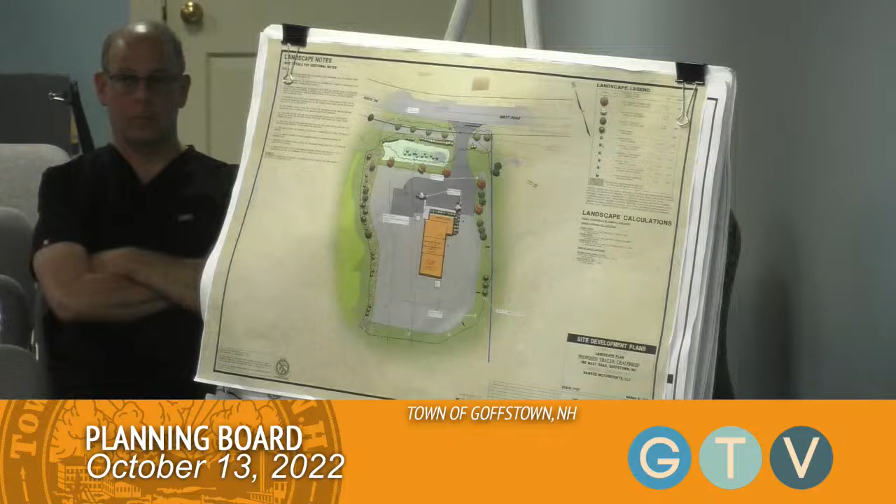There are 2 phases. The first phase is just going to be to create a small clearing with gravel and pave the driveway entry sequence, and construct the drainage pond, which will include only overflow storage for his existing business. There will be no showing of inventory to customers or sale of equipment on this site under the initial phase.

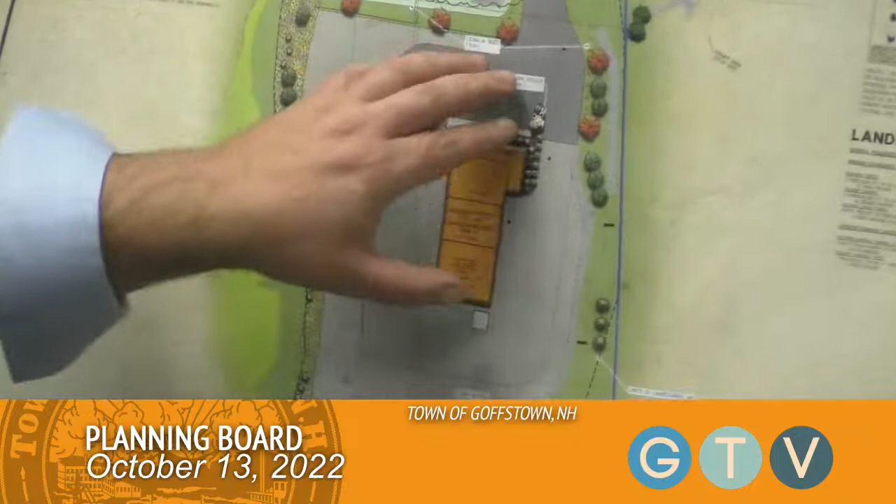The second phase, or full build, consists of a 4,800-foot building with some garage bays, the creation of the parking field, and the creation of the storage area in gravel on the remaining portion, as well as the landscaping.

The waivers are, and they've been submitted in your package: one for wetlands and topographic survey over the parcel, which is roughly 27 acres. We've surveyed the wetlands and topo within the development area, such that we know we're not within any jurisdictional setbacks. We've identified all the jurisdictional and topographic resources required for construction, but we're seeking just relief from the overall undeveloped back parcel for topographic and wetland survey.

And then finally, for the parking area, which I actually submitted a waiver for—let me see here, just so I clarify things properly for the record—this landscaping waiver is for section F, Appendix 2.3.

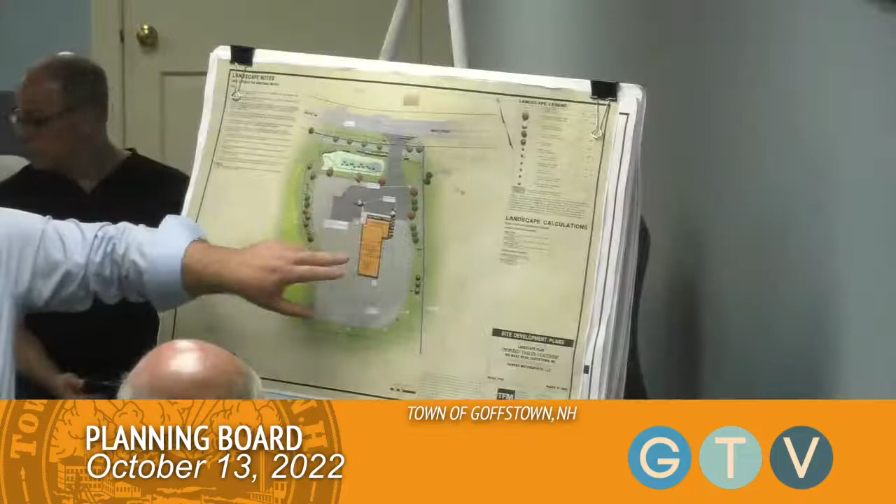Interior landscaping requirements, phase 1 only. It's really a question of whether or not that applies to the project. It's a requirement for trees and shrubs to be put in relative to the parking area, or in this case, I guess you'd have a display area. But for phase 1, it's a small footprint, so the tree and shrub plantings required for this project are outside of that footprint area. To plant them in the first phase, obviously, it would be in the grass, and they'd be worked around for phase 2.

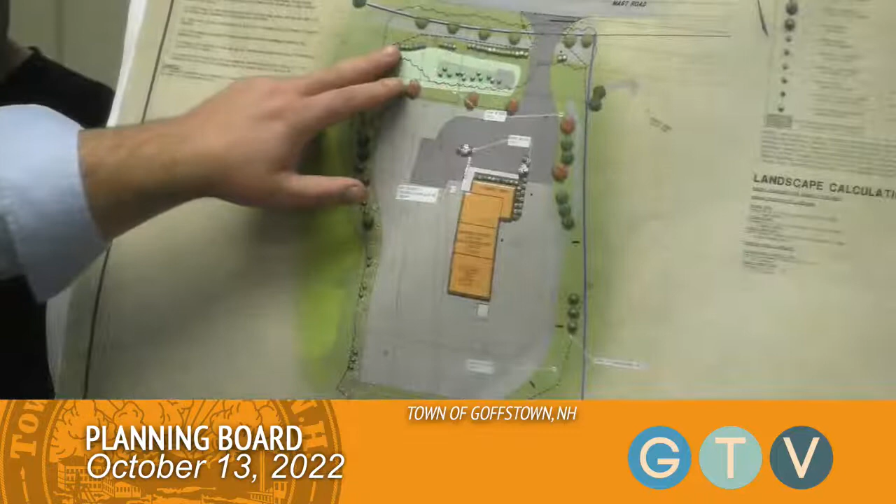For phase 1 of the project, we are proposing a lot of plantings, as you'll see in the right-of-way along the rail trail area. Those are shown on the site plans for phase 1 that show all of these proposed street tree plantings. The shrubbery along the rail trail will all be done and completed in phase 1.

So that comes to the issue of the rail trail and the proposed improvements, which we've worked on for a long time and met with the rail trail group in the spring to outline what we were looking to do. It was identified that accommodations could be made by our development to utilize that area.

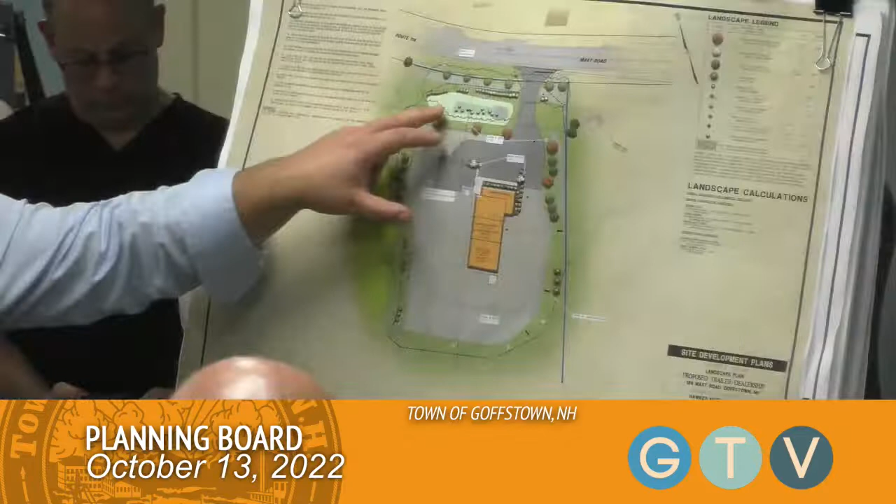There were some specific site constraints that will enable us to benefit from the better soil conditions. As you go to the south, you have ledge outcroppings, such that to build this program, the use of this sandy area adjacent to the road and the rail trail minimizes our footprint for digging and excavating. It's also not identified by the rail trail group as an area of their potential use.

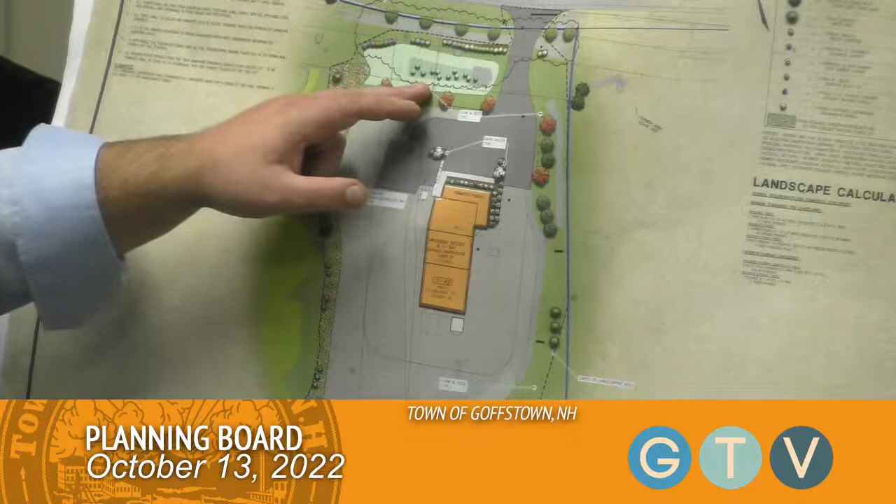This general drainage design for the project will intercept a lot of the runoff coming off the hillside and detain and infiltrate that water into this new BMP, which will improve the drainage conditions in this vicinity going forward, where there's currently puddling and undefined drainage patterns in that right of way.

We're also going to be planting enhanced shrubbery streetscapes, which will dress up and provide a positive visual component that will benefit the town. And Austin has agreed to provide some of the labor for the improvements to the rail trail, so that when this section is improved in the near future, we're providing that benefit to the town.

Most importantly, we've got the rail trail group and the select board, who have kind of green-lighted us today. We've gone forward over the several months, before I actually even came to the board, with no negative feedback. Then last month I saw in the staff report that there's some staff against it, which is unfortunate. I would have approached this differently if I'd had earlier feedback — I know that's not necessarily required of the town — but if they'd had those feelings initially, we may have taken a different approach.

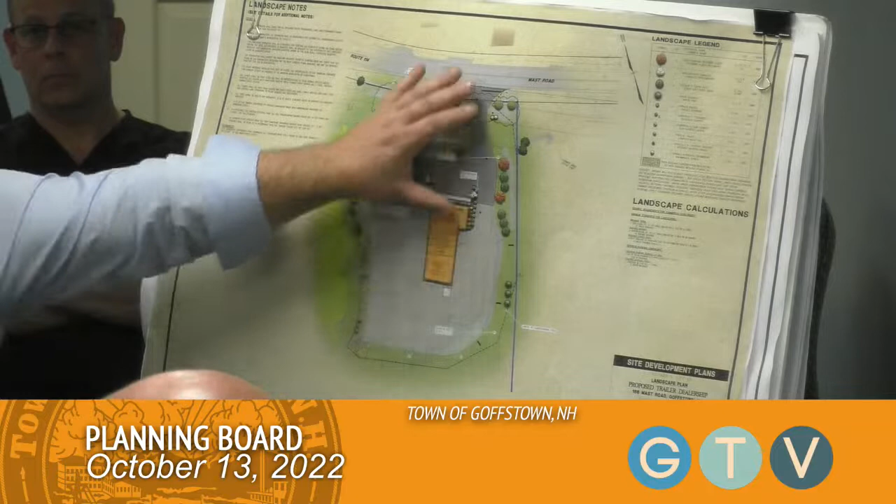Getting back to the basis — the soils as you go south on this property change. The general soil structural qualities and the soil complex change. We have good sands down near the rail trail, but as you head south, you develop shallow restrictive layers, ledge conditions, and a high water table. These features are unique to this property and potentially other properties in this general vicinity.

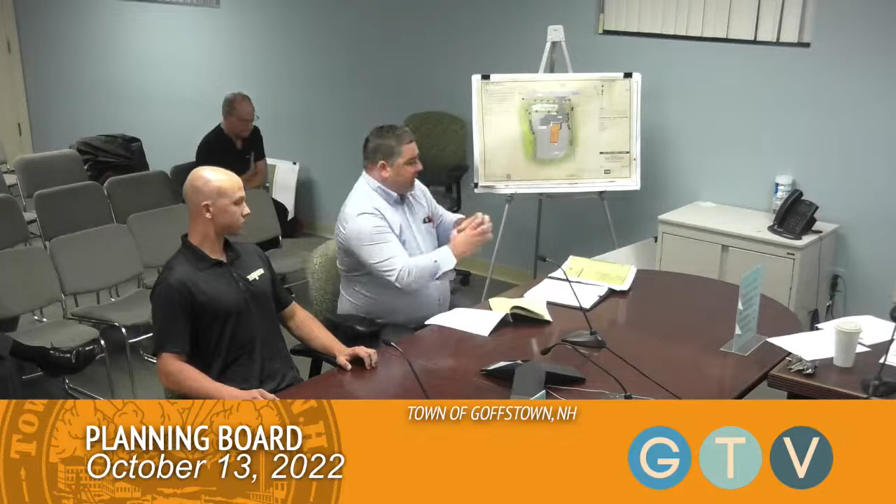That allows us, if we were to utilize this space within a portion of the existing rail trail, to keep our overall site work and excavation minimized, where we're not working in the ledge conditions and disturbing more of the natural woodlands to the south. That's a unique aspect of this property, which is different from other properties, I believe.

Finally, we're basically looking to secure a permanent drainage easement to construct this — essentially an infiltration pond — in a portion of the rail trail right-of-way. It would be maintained by the applicant or his heirs and assigns going forward. I think it will benefit both the public, or the town, in terms of the drainage improvements, as well as Austin, by allowing him to minimize his site costs.

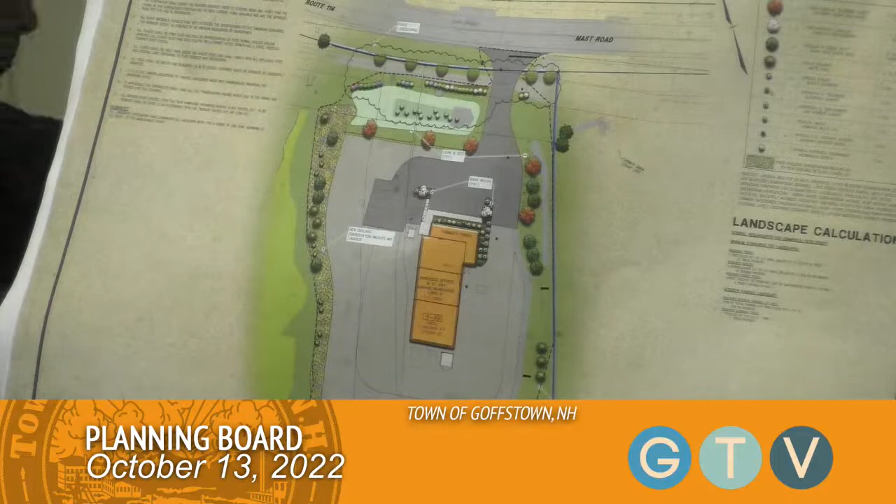Like I said, the terrain starts to slope as you go back into the hillside. So the further the site gets pushed back from the road—and it's already very far from the road because you have a 60-foot right-of-way minimum from the rail trail, plus the road right-of-way is pretty wide—so we're already back further than we'd like to be for the display of this equipment, but more importantly for site balancing purposes, this is a plane of earth that has to slope generally flat within the development footprint. So as you go south, it creates more of a cut situation, generating unnecessary cut excavation and cost that would be absorbed by the client.

So I think that's a hardship to him that would be imposed. Anyway, that's the main thing I'd like to resolve and have some feedback and discussion on, because it would obviously involve significant redesign if we were not able to make a deal with the town for this easement.

And then some of Scott's comments in his letter, which I did not address, are directly related to the detention pond condition. So I did not invest any effort going forward on that. I am meeting with Scott next week to look at some general drainage at the intersection of the proposed driveway, and how we can clean that up and potentially make improvements to the new intersection.

I'd also like to say that this driveway location, although not approved by the DOT, is recognized as the most appropriate and feasible location for the new access point, due to the fact that it has the best sight lines along this section of road. Therefore, that is a fixed location as part of the DOT process for this project.

I understand that a letter has been submitted, which I haven't seen, but we were aware of an abutter claiming to have potential rights of access to the parcel, and something has been submitted on that.

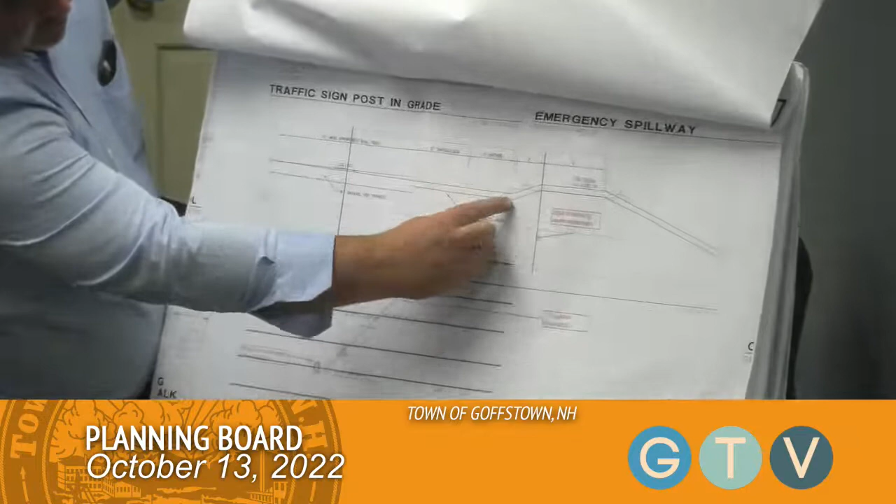This is a 10-scale blown up, so here's your rail trail, this 10-foot strip, the 3-foot shoulder, 3-foot grass beyond the shoulder, and that's where this berm starts—a 3-inch to 5-inch elevation rise, and then it goes down a few feet to the bottom. It's the same situation; having an embankment outside of the shoulder area does not impede the intended use of the 10-foot path.

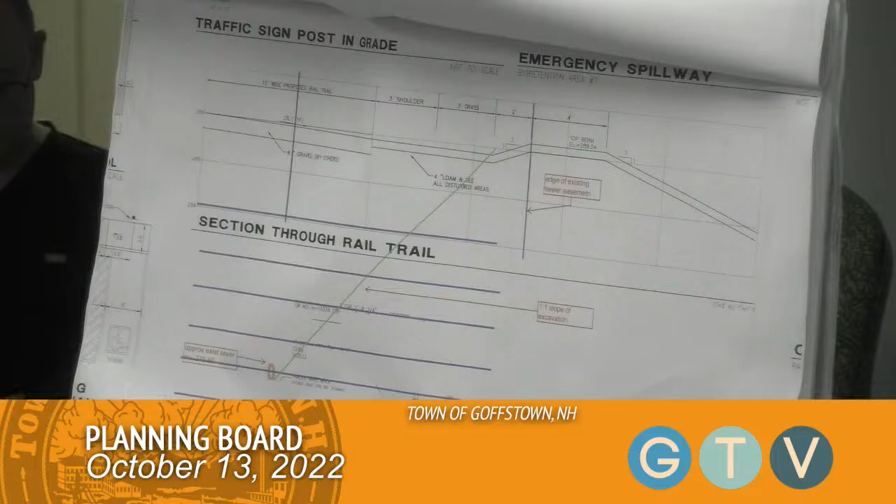That's why the Friends of the Rail Trail, as an advisor to the Park Department on the trail's construction, were not concerned about the earthwork for the detention pond. It doesn't impede the passage of the path. So the detention pond in its current design doesn't have the 1-foot freeboard. The town engineer has other concerns about why that detention basin is there.

On your other comment, which I know you haven't seen—in anticipation of this, I plotted the existing sewer trunk line here, centered on the road's cutback. That's a 1 to 1 cut slope. If you were to open cut it, it shows that the cut can be made without even impacting the berm itself, the start of the berm.

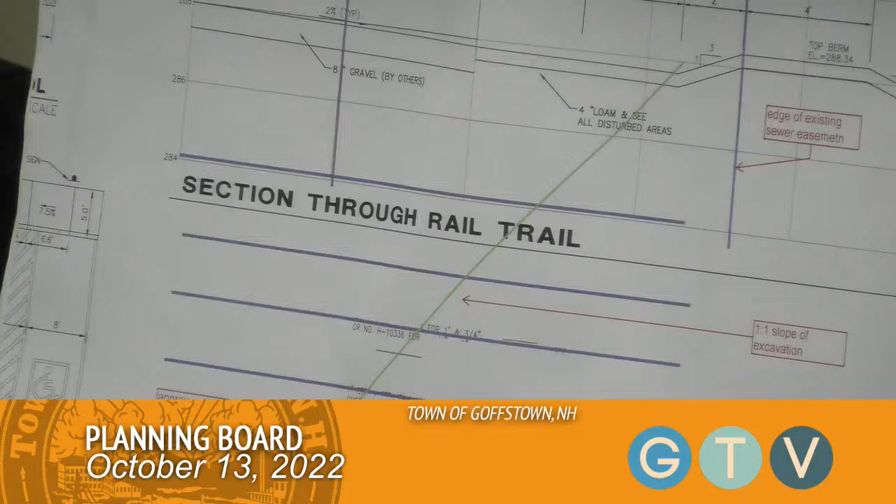So in terms of your concern with construction, because of the width of the easement—a pretty wide easement, 25 feet, is the width of the sewer easement, centered on the pipe—that would be an open cut condition showing that it would not interfere with the operation of that pond. Just so you know, you haven't seen that.

Have you discussed any of this with the sewer commission? We met with the sewer commission and presented the same plan we're talking about today. They had no concerns, other than they wanted us to try to tie into an existing stub.

Who said you have no concern? The sewer commission, when I met with you. We talked about your stub, we didn't talk about a detention pond. Correct, yeah. Well, let's just determine the conversation here—you said the sewer commission didn't have any concerns when I met with you about the stub.

With the development, that's fine, and you can continue with the proposed line, flow, and capacity at the plant. Yes. We did not review this cross-section, and we didn't get into any detail relative to the pond condition or the easement. At that point we hadn't—that was actually in the spring. Yep, I remember. We hadn't gotten this far with everything, so you're correct. Thank you—we're happy to go back to the sewer commission if you'd like.

So my question for you is, I have two questions. Why did you not do testing along the sideline of this property adjacent to the wetlands on the north side for your detention area? I understand soil conditions can change within the site, but did you do actual test pits to prove there's no sandy soil on the north side?

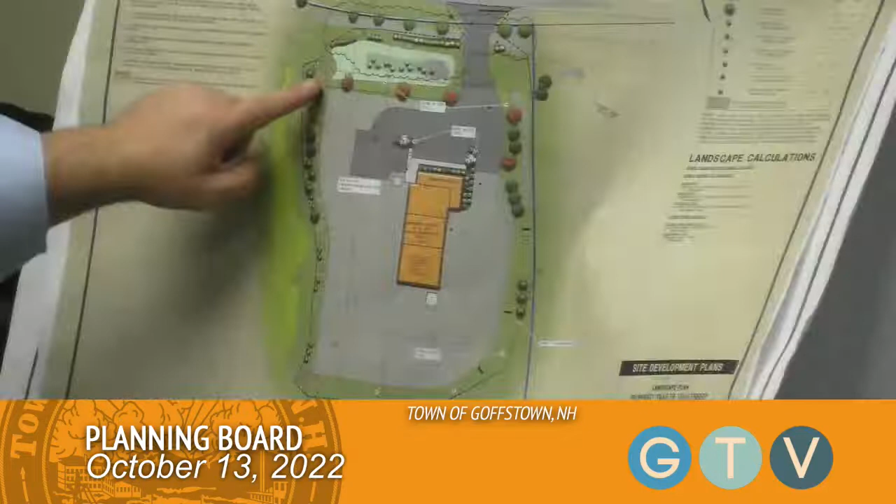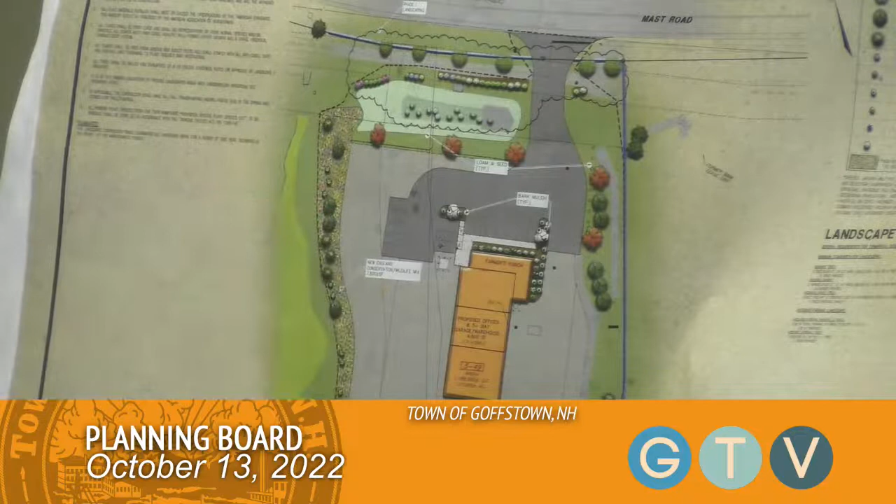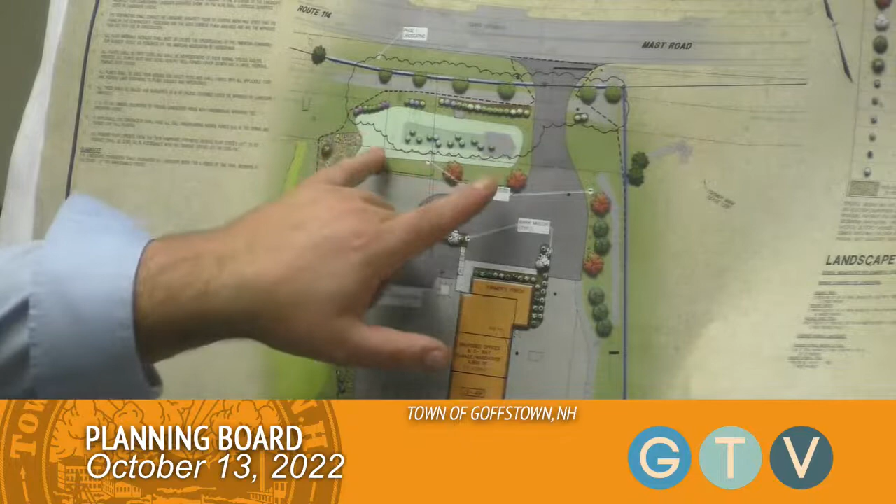And also, generally speaking, we did do test pits along the corridor and then back into the site. We found that the restrictive layer is higher in the ground as you go south, which is expected because you're getting into a hillside condition. So we have the cleanest sands right in this area here.

Any other members of the board? I have a question. What is the town's property interest? Is it a fee interest, is it an easement? What does the town hold? A lease, right? Well, it was a land lease. I think David could speak to this better than I could.

Or what's the current status of the town's dispute over that property interest? Land lease—I believe I've seen a report from a town attorney that the wording of the land lease, as it was interpreted prior to the Civil War, in fact meant a perpetual ownership. That's my understanding. The reason I ask is an easement can be for a limited purpose, but if you have essentially a fee interest, you have exclusive use and control. So if it's just an easement for a rail trail, you could in theory have another use on the property. But if the town's interest is greater than that, then it's as if it's going on town property. That is my understanding.

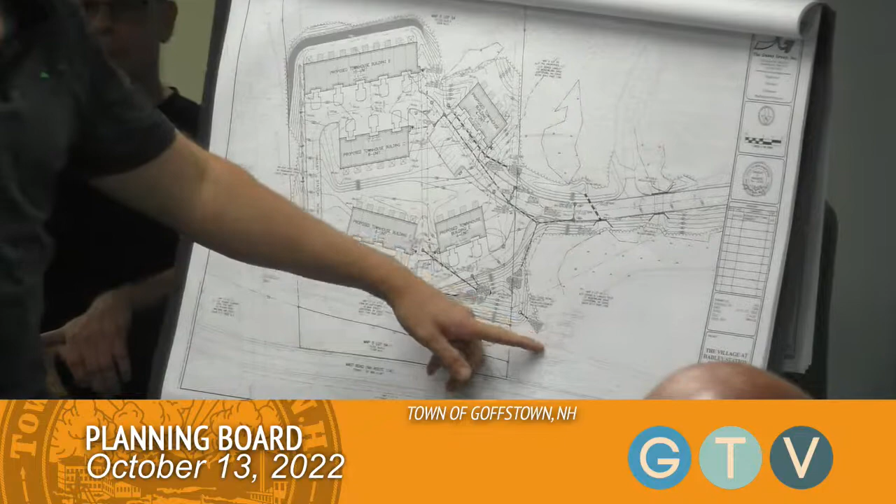So what happens is the drainage splits, and our modeling shows this, and a portion of the property comes to the edge of the rail trail and then drains, because the rail trail from an elevation standpoint is higher than anything else. So unless it was like a massive flood, it wouldn't go over the rail trail. It directs to each side. So you get a directed flow to this point here, and you get directed flow to this point.

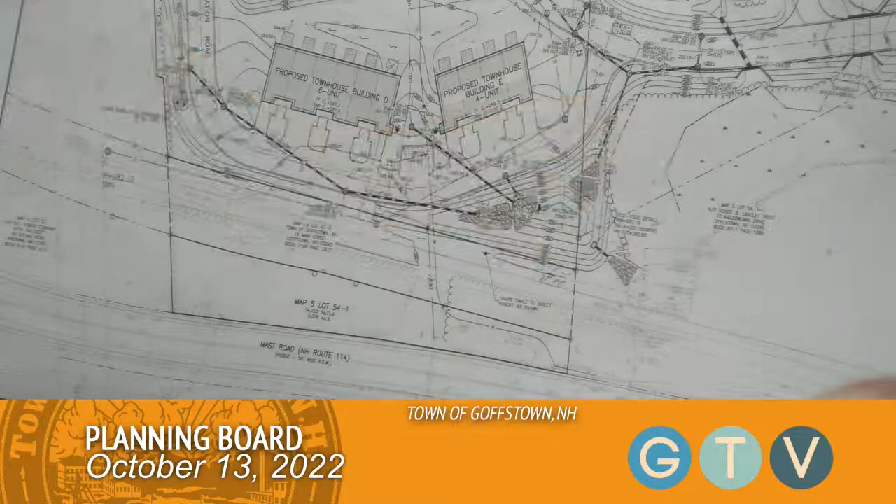Because we're altering all the land right adjacent to our property line as part of our pond construction, I wanted to make sure it was very much understood that from a drainage standpoint, and this is for the benefit of the rail trail, that water still very clearly goes through. We're intercepting and capturing most of it, but anything from the rail trail or our property that isn't captured by our pond system, outboard of our pavement area, there's about 10 feet of pavement or grass area here. Any of that area that goes, it still breaks in that same manner.

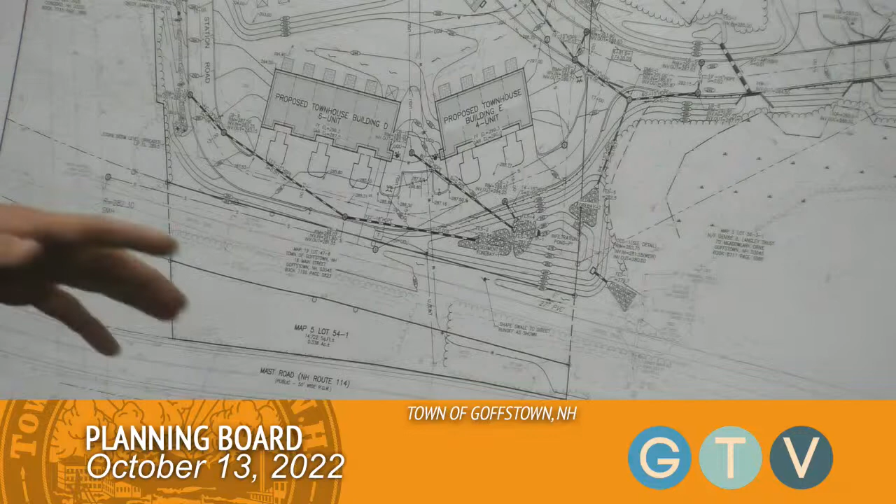The other thing to consider is that in this area, there's an existing driveway that services the single-family home that's there. That's going to have to be removed and dressed up. And in dressing that up, you can see I have some modification to the grade here, just to flatten this out and provide some continuity on the trail.

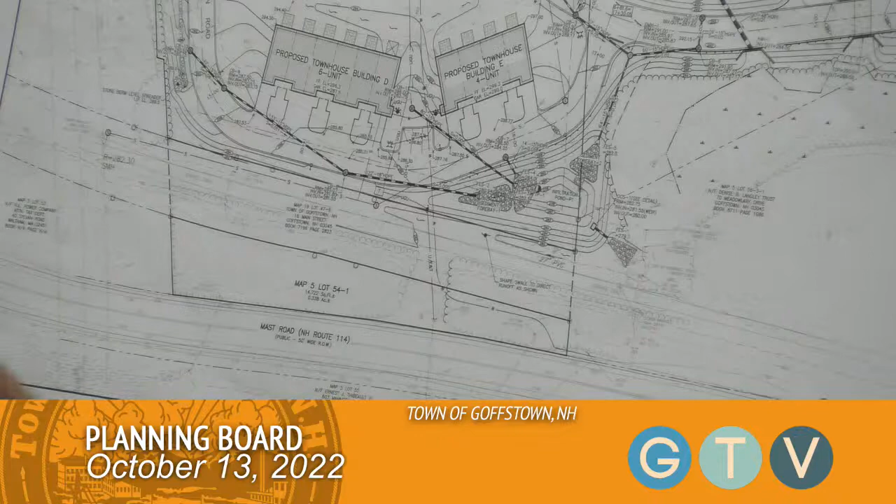So I consider this drainage as something that was already there, but just reshaping and cleaning that area up. If it's not something that the town wants to see, we can leave it off, but we can't really be responsible for any puddling or issues happening as part of our construction right adjacent to the rail trail, unless we can at least shape that as it continues to do today. So that's our standpoint on that part of it.

So two questions. Obviously you're going to provide a drainage report that shows your pre-development and post-development runoff. Yes, you'll take care of that. It's already been done, good, and has gone through one review with Scott.

Second question, you talked about the 36-inch RCP that runs under the trail farther down. I've looked at that pipe for 15 years and I've driven by there or more. That pipe is about half full of debris. It's one of my comments.

Have you calculated the lack of flow through that because it's blocked, or are you going to clean it out and improve the swale to get that pipe running free? That's a question for later, for you to talk about at a later date. Fair enough, okay, I don't want an answer now, I just was bringing that up because I've looked at that for years. I actually commented on that, to have them clean it as part of it. The swale has to be lowered significantly for that to run free.

While we have what you're talking about in front of us, are there any other major planning issues that we need to identify at this time without taking up time? 'Cause Tim has some of that. I don't know how major it is, but I have a concern with the drainage pattern that they're showing, so I don't know if you have plans in front of you, but there's...

You know what I'd like to do with that, Scott? I think maybe you ought to work with them directly, because this is something we don't need to discuss in the meeting. Just identify what the issues are. You can identify it sort of in the comments, right? You can send the drainage issues. Yeah, I mean, that's a big one for me. You can relay to Doug your concerns, and he's seen the comments and we can discuss. We're not gonna figure the drainage out here tonight.

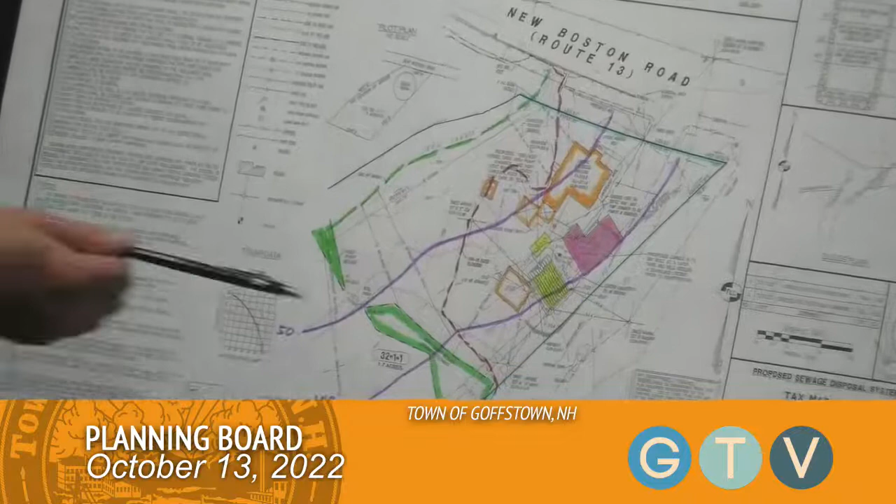What Mr. Hall is proposing is to build a 600 square foot garage located in this location here. The purple lines right here and here depict the 50-foot waterfront off of Bog Brook, and then a 100-foot buffer.

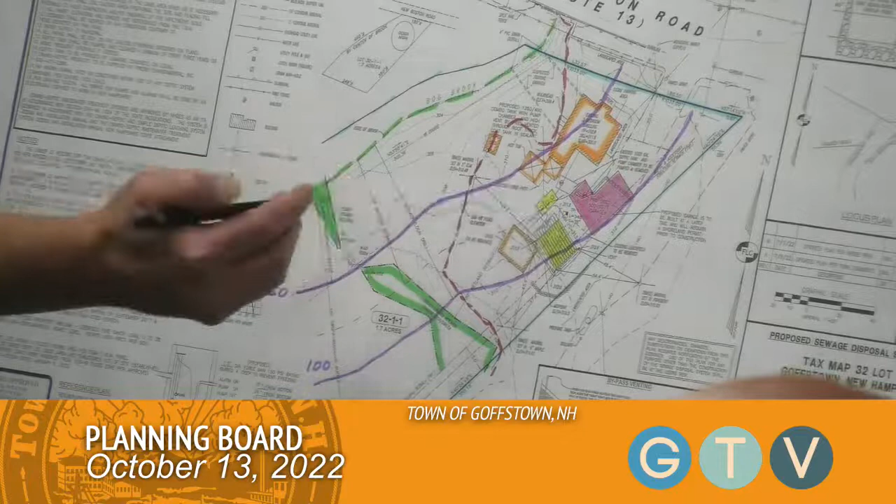The existing septic tank is here, and actually where the garage sits now, there's like a raised bed from where the leach field sits now, and that's the reason for the relocation.

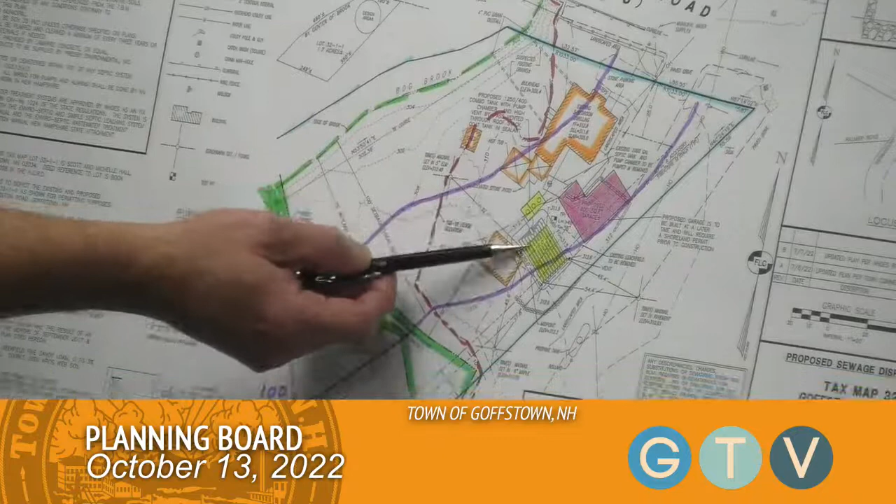What you're looking at right now is the approved septic plan from the state of New Hampshire. It's just marked up color-wise for you.

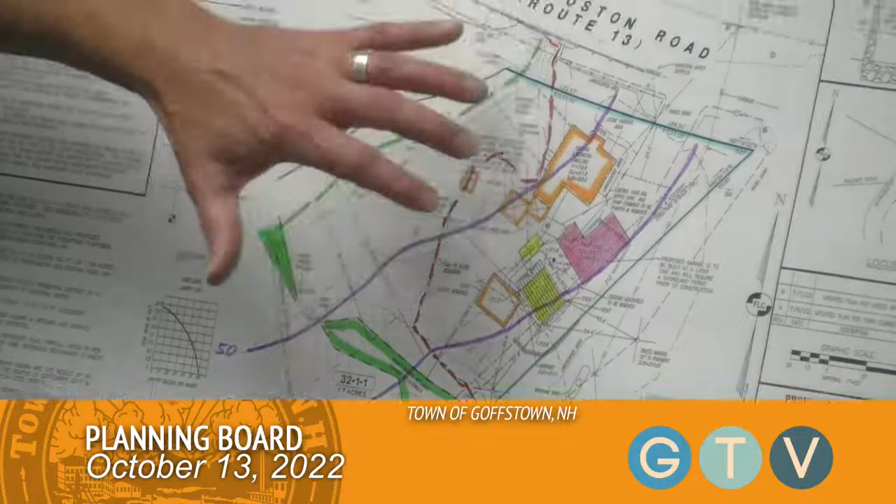As Joanne indicated, not only did we receive state shoreland approval, but also favorable comments from ConCom. We were able to get the residence out of the floodplain, which is very helpful for Mr. Hall. Absolutely.

So basically, this is the last step before the board is to request a conditional use permit. I could go through the criteria if you'd like.

We'll see if there's any questions for you before you redo that process. Sure. Anybody have any questions for the applicant?

If not, would staff, Joanne, would you like us to go through the conditional use permit? Or can we just take the report as presented and have it in the record, so we don't have to read it, we can read it ourselves. We can do whatever you suggest, Kim, if it'll shorten things. I think as long as the applicant confirms that the presentation, the findings in the report, are correct, we can act on it.

The staff report? No, your September 20th. Oh yes, we stand by that, yes. The wetland scientist, yes. Okay, so before we go there, I do have a question.

I'm looking at your approved septic plan, I believe. Is that what this is? Is this the approved septic plan? Yeah. Are you going to tie the garage into the tank and into the septic system, or is it independent of the garage?

No, there's no plumbing in the garage. Okay, I'm just looking underneath the garage, I'm seeing an existing tank, and then there's also a second tank on the property right now. That's getting removed.